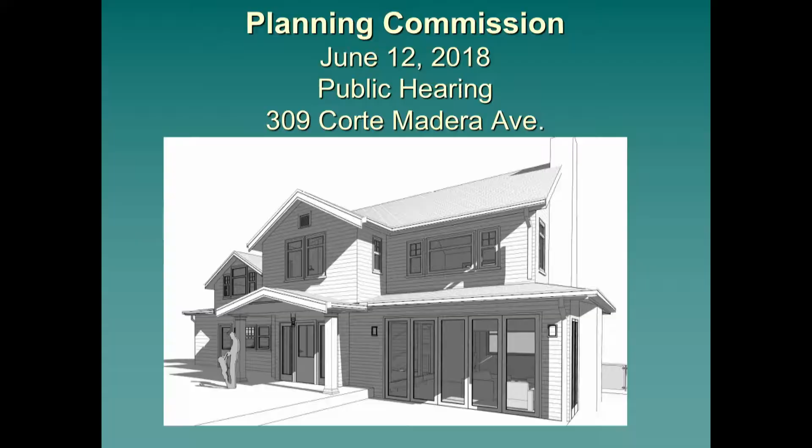So yes, the project before you is the expansion of 309 Corte Madera Avenue. This is an existing home, and I'll just start with the location. Location is about halfway up Corte Madera Avenue on the inside curve. It's an older home located just almost touching the property line, which is adjacent to Corte Madera Avenue. This is in the R1 zoning district, and it's also in the Christmas Tree Hill overlay. So there are special requirements for that.

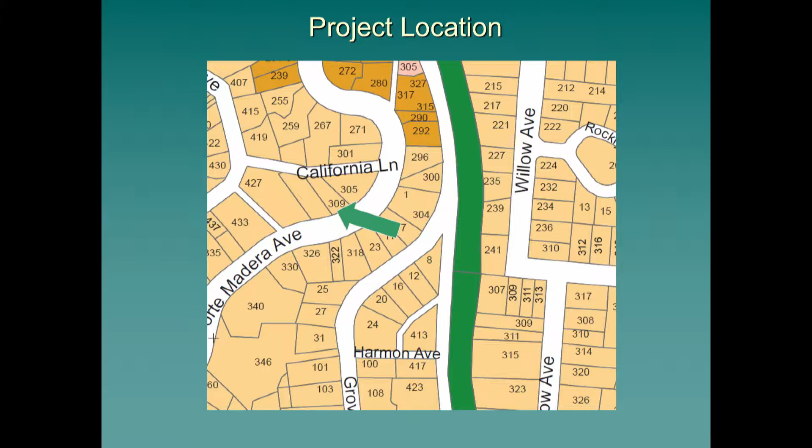In terms of the project summary, the expansion will result in a proposed floor area ratio of 22%. Currently, the project is about 16% floor area ratio. Maximum allowed is 40%. Lot coverage existing is 16, proposed is 22, and maximum is 40. So it's under both of those requirements.

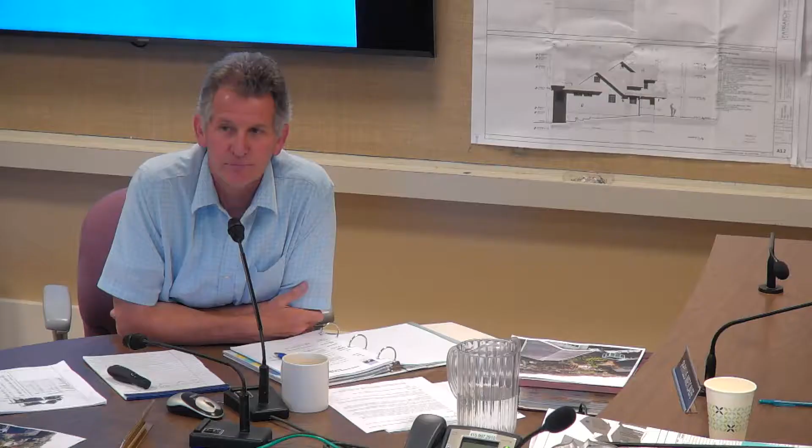In terms of setbacks, because this is in Christmas Tree Hill, all property lines that are adjacent to streets have flexible setbacks. I think probably all the projects you've had, the front setback has been flexible because the property line adjacent to a street in most cases is the front property line. In this case, we have property lines adjacent to two streets, Corte Madera Avenue and California Lane. California Lane is a private lane.

However, we have determined that there's flexibility on both setbacks, the setbacks adjacent to California Lane and the setbacks adjacent to Corte Madera Avenue. California Lane, as you'll see, is kind of irrelevant in this case in terms of the development, but those are the guidelines.

In terms of side setbacks, standard with all other R1 properties, the side setbacks are 6 feet. And in this case, the north side is relatively close to the neighbor to the right, which is 305 Corte Madera Avenue. The existing setback is quite close. I believe it's about 2.5 feet, and that's proposed not to change. So that's an existing non-conforming setback on that side.

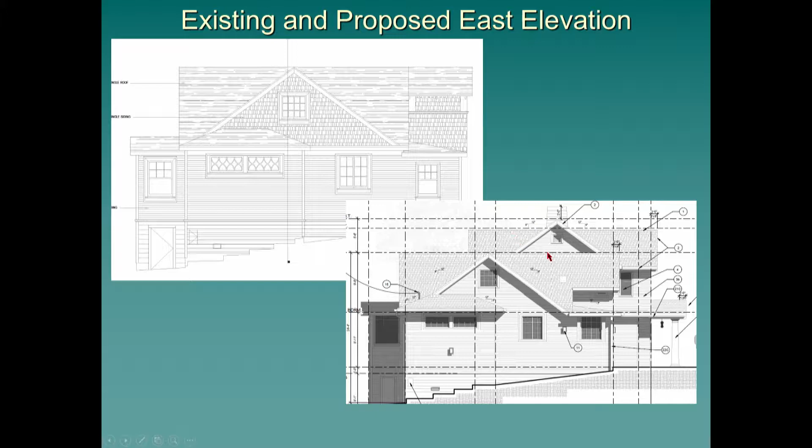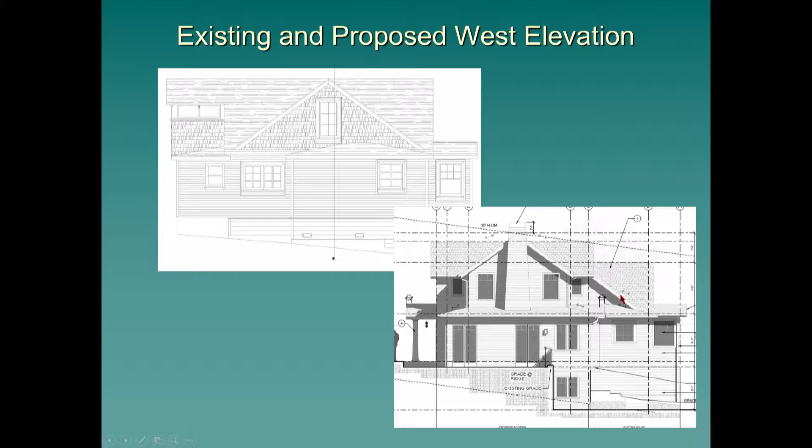Switching over to the changes to the west is this elevation here, bringing out the new structure. Again, most of the existing structure cannot be seen because it's covered by the new addition here. Again, horizontal siding, windows to match, and matching gable roofs at various points.

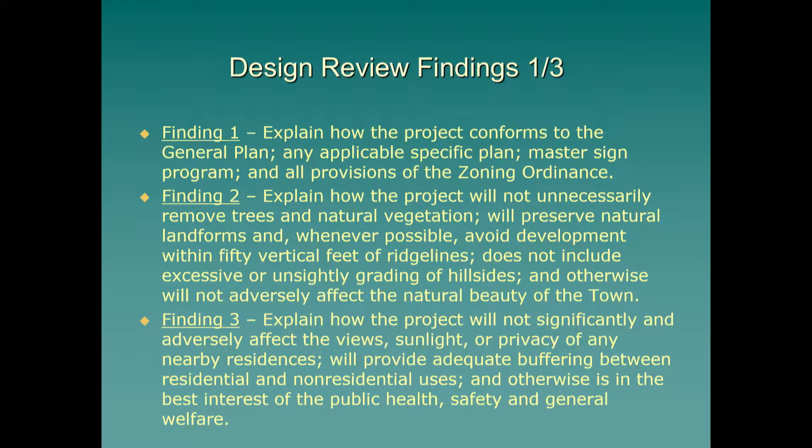That pretty much concludes my report. Staff has attached a resolution outlining all the findings. Staff is able to make all the design review findings for the project, and those are shown here in these three slides. And based on that, staff recommends approval of the project and approval of the attached resolution. That concludes my report, and I'll take any questions. Thank you, Phil.

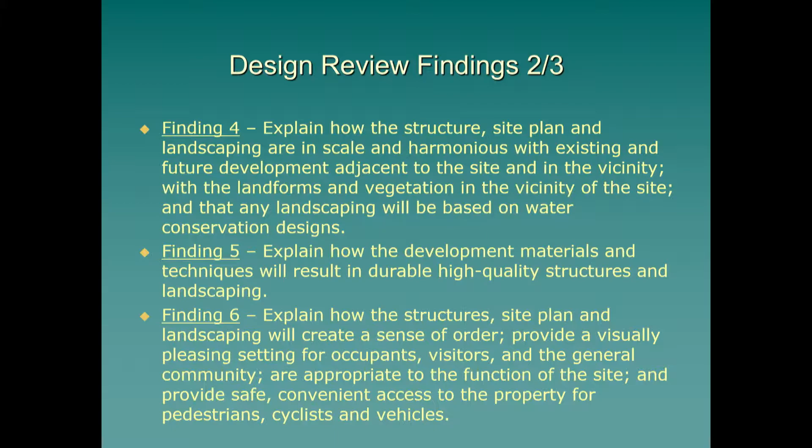Our commissioners may have some questions. Phyllis, do you have any questions? Not at this time. Dr. Bundy? Yeah, Phil, on the patio itself, is that going to be a pervious structure? I know the stones won't be, but what they're set in, is that going to be concrete, or is that going to be some kind of pervious material?

I'll have the applicant address it directly, but my understanding is not pervious. It is a solid stone patio, unless they're putting some type of special grout in between the stones. Probably the water will not seep through it. It'll run off. Okay. That's all for you? All right. Charles, any questions? Not for Phil. Okay. Jennifer? No, not at this time.

I think though, Bob, I guess it says it's set in sand with subsurface drainage, is what I read here, the permeable stone pavers. It's on the first page. It's on the site plan. Permeable stone pavers set in sand with subsurface drainage, yeah. Yeah, that would be a good question for the applicant. What is that patio structure made out of? I don't have any other questions.

Okay. Phil, I have a couple of questions for you. On the plan that you've highlighted the elevations, and you've got some circles around 88 and so forth. It says here on the plan that the top of wall is 95.5, which is 3 inches above the patio surface. And then up there to the right, it says bottom of wall at 90.

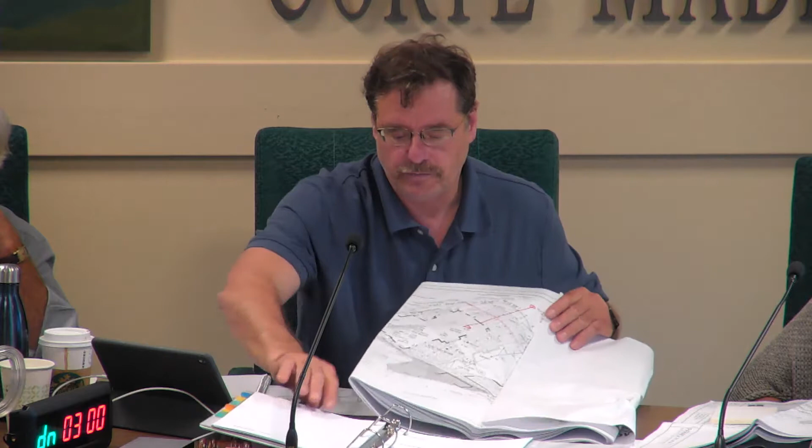That's what I assume it would be. Thusly, it would be a 5.5-foot wall at that point, plus a railing. Is that fair to assume? We can ask the applicant. Yeah, I'd certainly like to ask the applicant, because in some way it is a wall, but it's a wall with only one side, right? You can't jump over this wall and get to the other side. So it's really a box. I look at it as a box with a lid on top of it that's patio.

Okay. For the record, would you summarize the discussion about Corte Madera Avenue improvements and the stone wall that's outside the property line? Yes, I will. Thank you for that. So we did receive the email from David McPherson regarding his interest and inquiry about a future project, the widening or improvement of Corte Madera Avenue, and particularly the pedestrian path on what I'll call the west side of Corte Madera Avenue. That improvement is in the capital improvement plan for the town of Corte Madera, created by the Department of Public Works, that just went to the town council earlier this month.

As I stated, there isn't a specific schedule for that project. There isn't a specific funding source for that project. In talking to the Director of Public Works, that is something the town would like to do someday, but it's not clear when that will take place. There are dozens and dozens of projects on that capital improvement program, and Public Works will work with the town council determining priority of those projects. But the intention is that stone wall will be replaced or improved, and then the public access, the path, will be improved as well at some point.

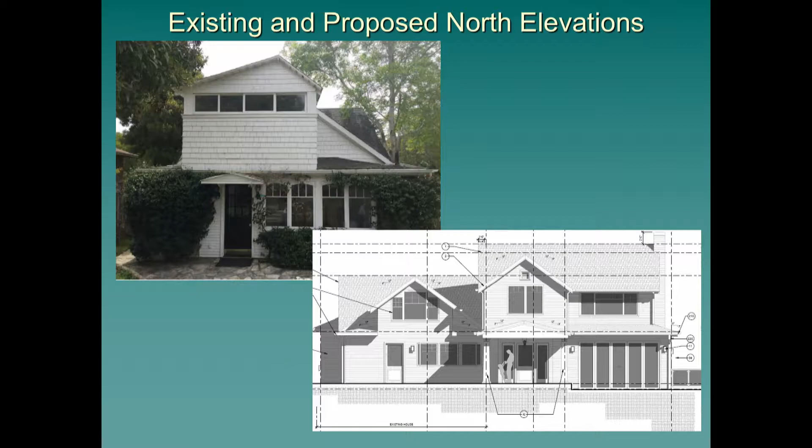The fenestration, the siding, the roofing, all of which are essentially mimicking and replaying what is there. Now, there are some trim details that we're going to carry throughout and add consistency. There was some inconsistency with the existing trim, so we're going to add that back in so that there's basically trim, siding, eaves, roofing. All those details will be consistent throughout, rather than a little bit here, a little bit there.

The other thing I'd like to do is just sort of answer questions. You've touched on a couple of topics. Number one, just sort of the nuts and bolts, the construction management plan. We've already started that and have been thinking about it. Obviously, guest parking, it's going to be off-site, and you have to carpool on a site where you've got a busy road, where it's not really good parking down below, and the lane is a little bit choked. So it's going to take a lot of good neighborhood outreach and good communication to make sure that these run smoothly. Dan is, in my opinion, a very good neighbor and will do a good job of communicating well.

One of the pressure relief valves we have on this site is that it's got a lot of open space up above. So there's an existing gate, which, if you can see it here, exists here. It's 12 to 14 feet wide, so that can be opened, and this is very likely to be the turnaround spot. So getting up and around, as well as allows for storage to be stored here. These fence panels also can be removed, and will be, actually, to allow for storage to occur here.

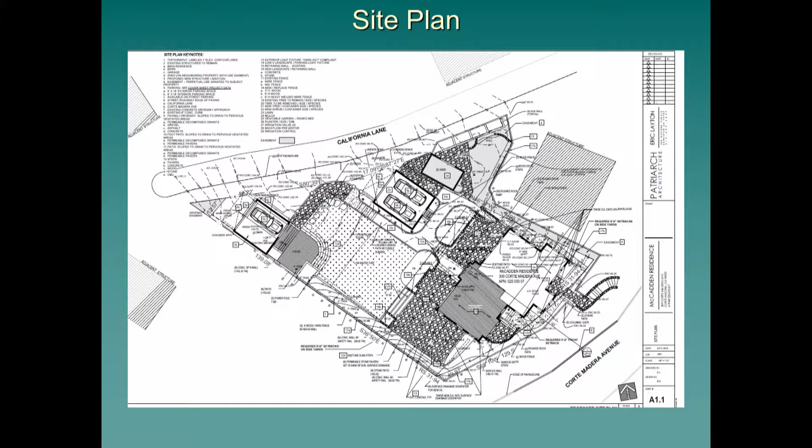There's plenty of places for temporary toilet facilities, and relatively reasonable parking for, let's say, a subcontractor that's a plumber or an electrician. All the labor really needs to park below and either walk up or drop off and then park down below. But the subs with their equipment on their trucks actually do have to come, and of course you have to have material deliveries. So it's going to take good organization and good communication, but it does have the opportunities to accommodate these things much better than a lot of other properties do, because it's got the land. So that's the good news there.

Some of the other questions you had on the pervious patio, that is designed as pervious, and the reason being is that if you have a solid surface, then you have to slope it all into the drain, and it accelerates the water, as you know, and then you've got to put in a dissipator and speed it up to slow it down. So why not just slow it down from the get-go? It also allows you to have a flat patio from the get-go. So if you set it in sand, you can put sub-drains below, but I'd rather not do that.

What I want to do is actually capture it on the back side of the retaining wall so that the water can percolate in and recharge ground water. But if it has to get to the wall, it'll be gathered up and then dissipated on the back side of the wall, which you'll see there. And I did speak to Public Works a couple of times and just made sure that he was comfortable with that design. And so we've already had several conversations on it, because it is a concern of mine as well. That dissipator is going to dissipate the downspouts that are on the addition. The existing structure, I've observed a bit throughout as we got in contract. I observed the March miracle that we had as far as rain.

Saw a lot of the rain coming, the water coming off the existing roof, and they do go to splash blocks, and they do migrate down and dissipate fairly well. And Public Works agreed that that was reasonable to leave those splash blocks as they were. So we discussed that as well.

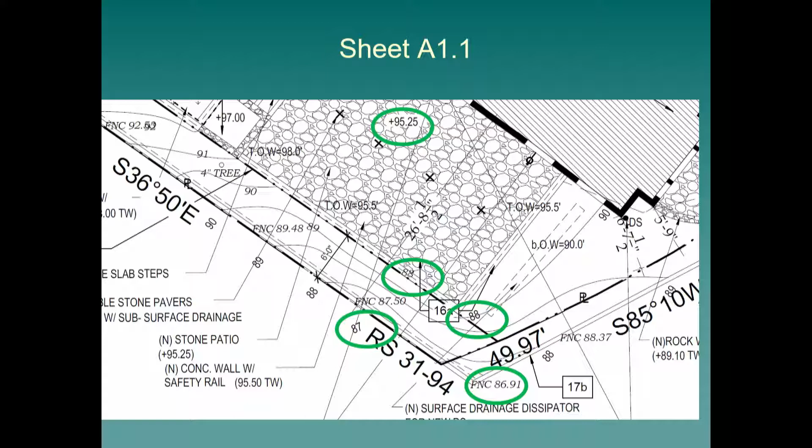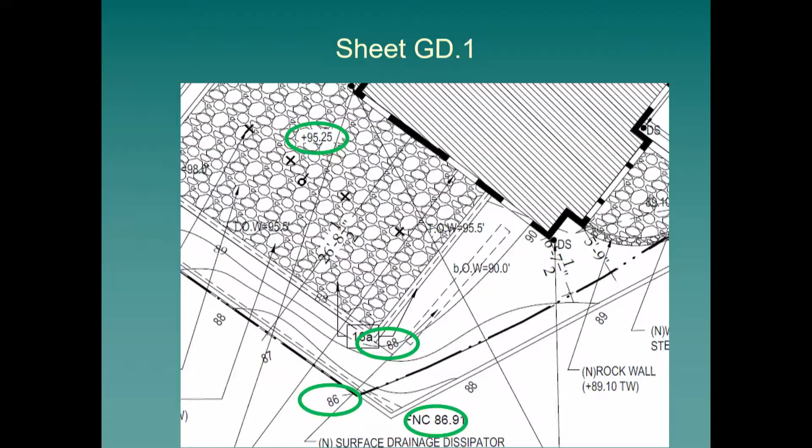I do. Okay, if you brought that up, the idea is that I had presumed we were going to plant some Myrica californica, which is a native evergreen shrub which grows pretty aggressively in this area, pretty happily, and it would fill this gap very well and essentially cover the entire wall within a year, maybe two. But you can get those in 5 and 10 gallon, and they're very happy in this area.

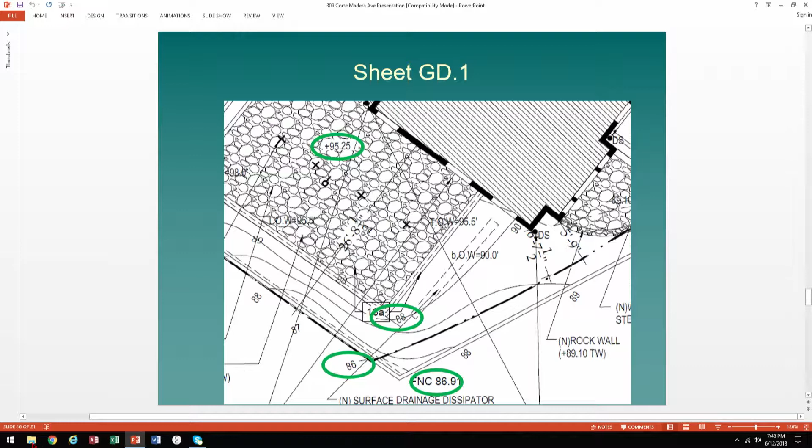And they would basically be in that zone between the retaining wall and the existing property line and the fencing. So that's on the landscape plan as well. The other thing that I think the landscape architect had intended on putting in that area was perhaps some larger trees that were deciduous. He had put in there red maple in that region, which would get up, and it would be again to the south of, to the north and to the west.

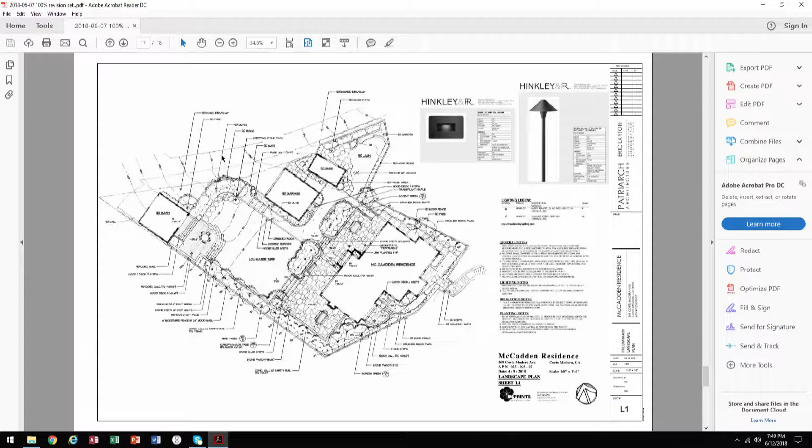So the Myrica would probably be in this area here, which is, again, screening between the fence and the proposed patio. And then this is where he's got some larger specimens. Now, again, this is south, so the sun is going to come up and do its thing. The vineyard is here. This line is kind of through here, and so this is the lower corner. The vineyard gets kind of narrow here, but that's definitely an issue, and it's fairly far over. I don't know if that would be an issue or not. We could do a little study on it.

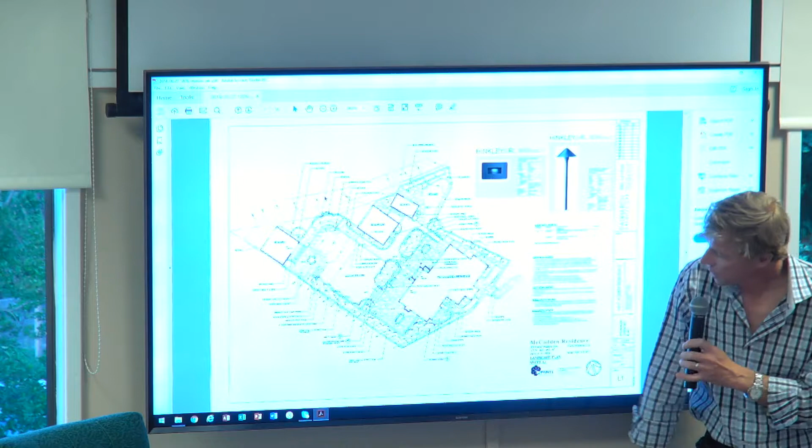But right now, there's a large amount of evergreen acacia here, which I think this would be a substantial improvement if we were to slowly phase out the acacia and phase in a deciduous 20-foot maple, would be my guess. So back to that question about the right-of-way and the fire vegetation management plan. Absolutely, it's in the WUI. We have to cut things back a bit.

And right now, there's a black acacia, which is slated to be removed here. Again, to Phil's point, it's on the naughty list with the firemen. So that's going to go. And then these ones here are within a region of being close to the house. So I think most of the acacias are sort of here. But my guess is that we may have to trim those a little bit. But again, it's on city right-of-way, so I don't know how we can do that.

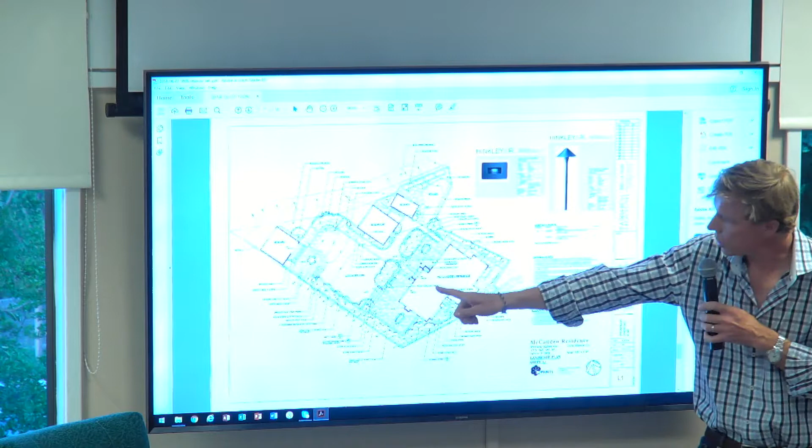But I guess we talked to fire and we talked to Public Works and asked to trim them a bit. Otherwise, there was a maple here, which is going to go. And most of the things that are going back in are ornamentals, and it's going to be an improvement, obviously, from a fire perspective.

So I think I covered the drainage, the other questions you had about landscaping, the elevations, and I will say that the patio in that corner is sort of way down near the road, and it's a way in which we can screen and buffer a little bit from the traffic noise, which nobody's really mentioned. It's a very busy street here, and there's plenty of outdoor space here. However, this is a nice spot because it's got a bit of view out and around the building. And so this is a preferred spot to have it.

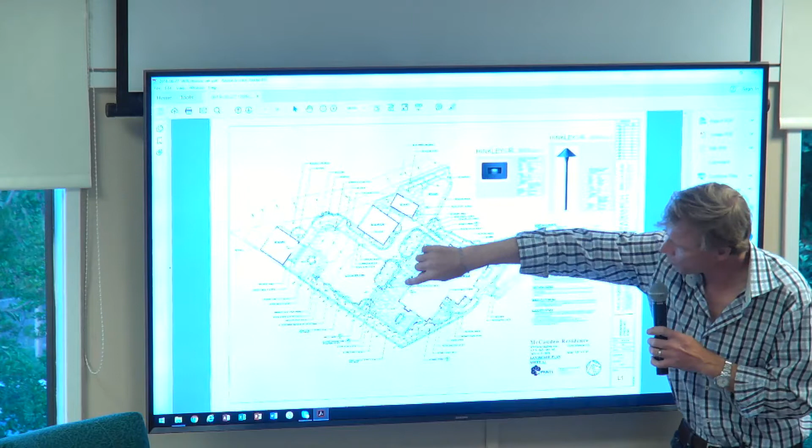And by having some sort of structure here a little bit, it kind of forces the noise to go up for the rest of the spaces. So that was the intent with that, but still really not making it too tall or too problematic. And there's really no other structures down there to really negatively impact. And we just don't want it to be negative to the street.

But I think all the mitigating factors we put in as far as landscaping, lowering the wall, and stepping it back to the setback on the side and away from the front seem to be adequate. But again, we're flexible on certain discussions on that point. So with that, I'll take questions. Thank you, Eric, very much. Charles, do you have any questions for Eric Layton?

I do. They're mostly about material choices and paint and that kind of thing. One, when I went to the site today, I observed that the newer addition in 1985 is kind of a brown. And then everything else is going this really nice white color. And in general, you're kind of creating this whole unified, really going back and reevaluating the property and taking it to this next level of cottage, right?

So I was wondering if you had thought about painting the garage and the shed to match the other buildings, not replacing that shingle, but just trying to bring it more, same with the garage doors, so that it looks like one property. Because just driving by, I knew what it was from the layout, but they didn't seem unified, so it reads as two different properties almost. I didn't see it marked out because you're not elevating any of those existing properties. So that was one question.

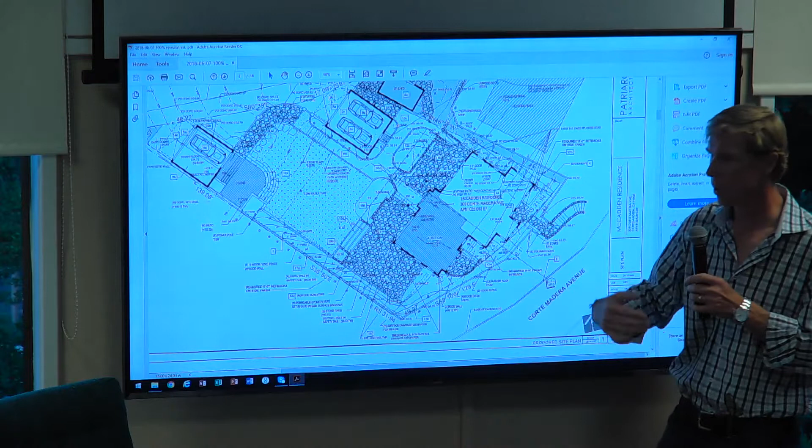Now, planting the Myrica here, basically that's a 12-foot shrub potentially, but very easily managed with trimming and whatnot. But it'll fill this gap very well, and so you really won't see that glass. It's just that the glass will be there to actually deflect the street noise. Does that answer your question?

It does, thank you. And then as it attaches to the barn, that's also then just a small concrete 18-inch high wall that's also being used as an end to the deck, is that right? Yeah, so here it dies to nothing. Right. So here it just kind of slopes away. Then up here,

again, it's sort of level to level, but as you go up that 2 feet, we've got some steps down, and so there's less than a 2-foot rise from the existing grade to this patio here. The grade drop between the patio and this landscaping area is not enough to require an actual fence or guardrail, so there really isn't one there. It's just the existing fence comes to here, and there's an existing fence there.

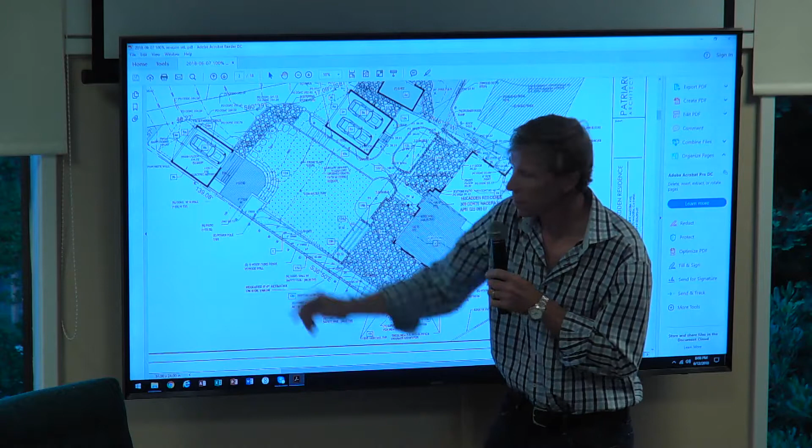Okay, and then the existing fence along the property line remains. Yes, that's the welded wire fence, and that remains. Thank you. Sure. I don't think that I have any other questions at this time.

All right, thank you. Dr. Bundy? All right, Ms. Metcalf? I wanted to bring up the barn, Dan. I had an idea, reminded me of something I did in my former home. Yeah, the shingled barn, the brown. That's the garage. The garage, but you were referring to the barn with the gambrel roof before.

The painter I used thinned the oil-based paint just by pouring turpentine into it. He then sprayed a small section and took a rag and wiped it off. And what happened was you had the whitish color, but all of the grain, all of the interesting patterns came through, and it was absolutely beautiful.

If you think at some time you want to bring the color more to the off-white, it's something to do and not lose all the beauty of the shingle. So it's like a weathered look, almost like a weathered white. Okay, very interesting. It was Dan Ross Painting. He does a great job. Right. Anything else, Phyllis? No.

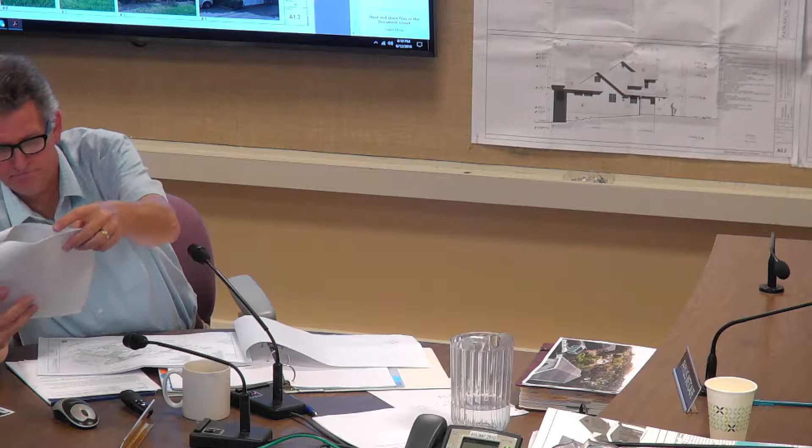Right. I want to thank you for providing the sketch of the property line that you did. And, just referencing top of wall to the grades, I can see that nowhere does it exceed the 6 foot in height. So it's like having a 6-foot fence, 6 foot in from the property line, and then you're having either the glass or a wire fence on top of that. And I looked at what you've got marked out and how it ramps up. So I understand it, and I think that with all that screening in there, it's going to go away shortly.

And the other thing that I didn't think would cover as quickly as it has is the ficus has just covered walls in a year, unbelievably so. And you can put the wash on there so it doesn't look bad for a year, and then in a year it's covered with ficus. It's amazing.

I was originally quite concerned about that wall. Now that I've examined what it is and what the elevations are, most of the wall is less than 6 foot. It's only down at Corte Madera Avenue, and as you turn the corner, then it starts to become less as you head up, and then the wall elevation jumps up at the back of the patio, and you have about a 6 foot elevation there, and then it tapers again to nothing at the back of the barn, or what do you call it, the cabana?

Dan? Yeah, the cabana's still. The cabana, right, so that will be the teenage hangout, right? The shed.

So, after all of this, if you have anything you want to say in addition before we go to public comment, please say what you might want to add. Yeah, sometimes questions come up during the public comment, and I want to be available to answer any other questions. I'll be here, put it that way. Thank you.